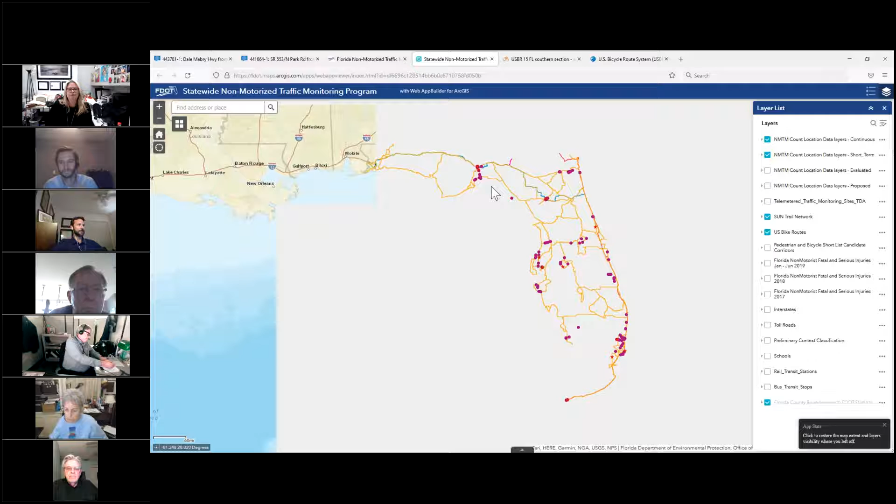This is the statewide map that shows all of the count stations where they have been conducted. Are you all able to see that?

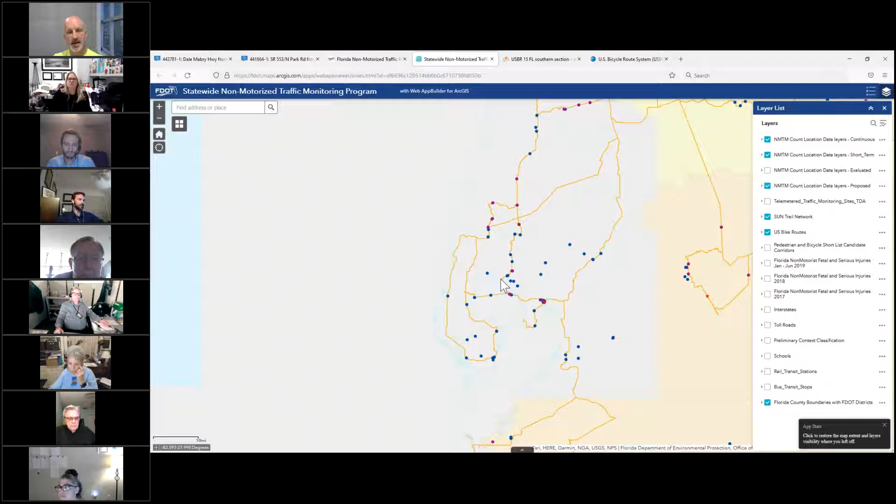Yeah, great. And then there are a couple of layers, both proposed stations, which are a much larger number of blue dots here. I think you'll see those ones on the Upper Tampa Bay Trail. And then there's a large cluster in downtown, which I'll save for a moment later.

And then these green dots, I'll turn some of the other ones off. The green dots are ones that have been further evaluated by central office, I believe, although counts have not been conducted. So I think those are some of the ones that are certain to be used in February. And then we're working with the downtown partnership on the other locations.

And all of that data will be available moving forward in one centralized database that fortunately we don't have to create from scratch. That would be nice. Okay, I gotcha.

So mostly it's a priority to create a database of counts on the multimodal, like the shared use path network. And to allow us to provide staff resources to set up those counters and take responsibility for the safety of those counters, although we've had some conversations back and forth and are comfortable with the limited risk that entails.

Okay, that sounds good. Do we have an unofficial motion to approve, or does anyone like to propose any amendments, comments, changes?

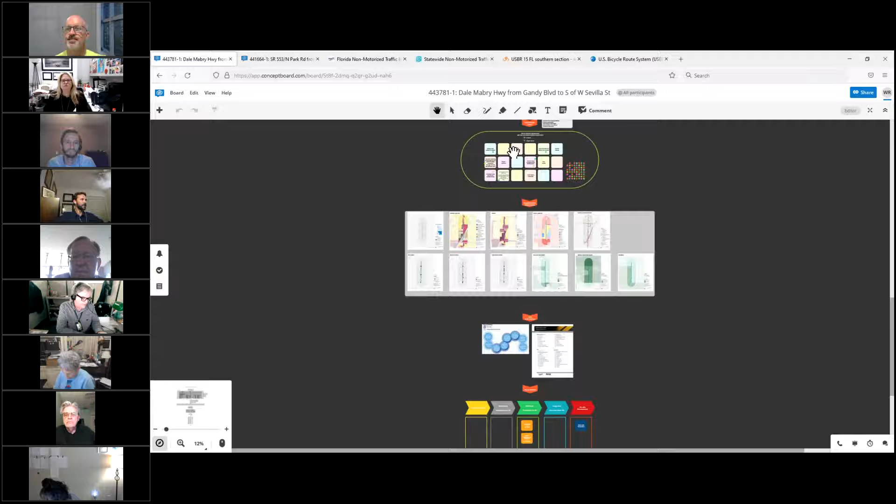The Dale Mabry Highway segment goes from just south of Gandy, the Selmon Expressway and the new extension there as well, to Sevilla Street on the north, which is just north of El Prado. So it encompasses about a 40 and 45 mile an hour stretch, and FDOT has been going through the process of collecting input on these.

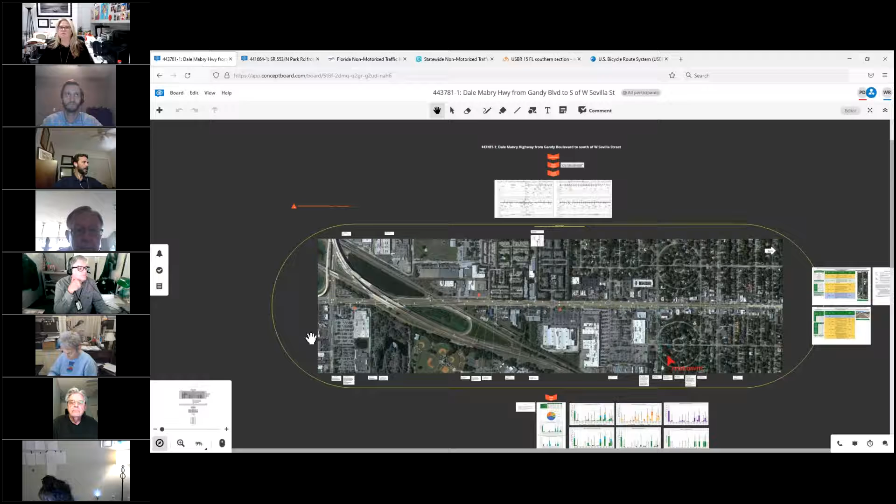It's held a series of meetings, roadway safety audits, both on-site and virtually, to look at possible improvements there. So zooming out a little bit, I can get to the overall, there we go. Sorry, it's hard to navigate this a little bit, but they have a number of comments and wanted to start running just these by the committee quickly.

There are a number of comments about enlarging pedestrian islands and reducing the radii of those turns. That is a heavy freight corridor, but those are being evaluated for possibilities.

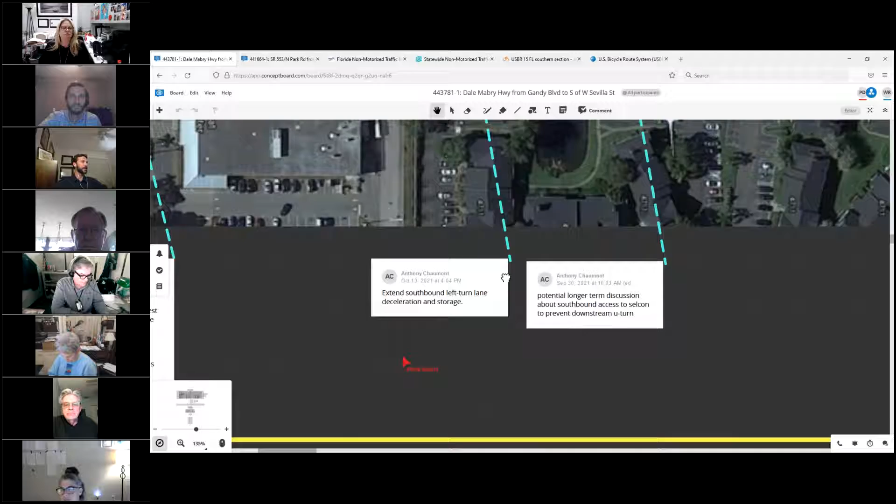I can even see that a couple of our folks have put comments in here. Extending the southbound turn lane, deceleration and storage, that is coming into the Selmon Expressway entrance, the new one, I believe.

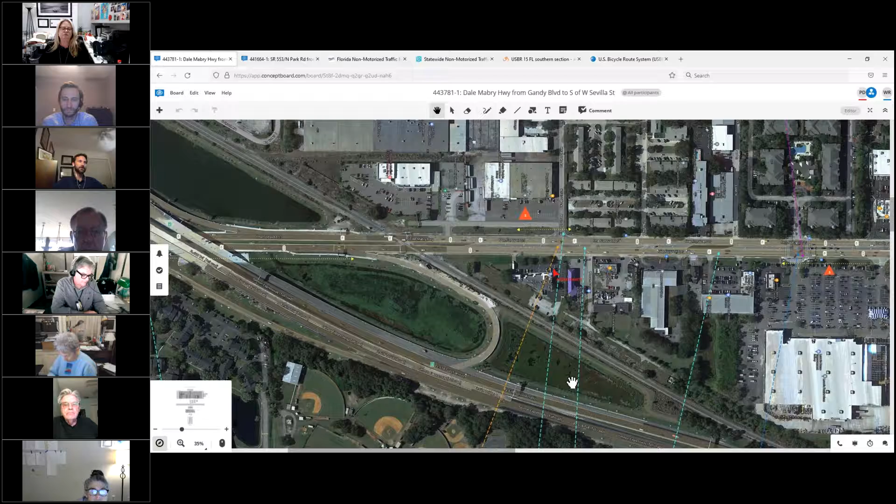And then as we move up, there have been a couple of pedestrian crashes at the entrance here to Fair Oaks, I believe, which was noted as a possibility for a mid-block crossing, or potentially an additional full signal.

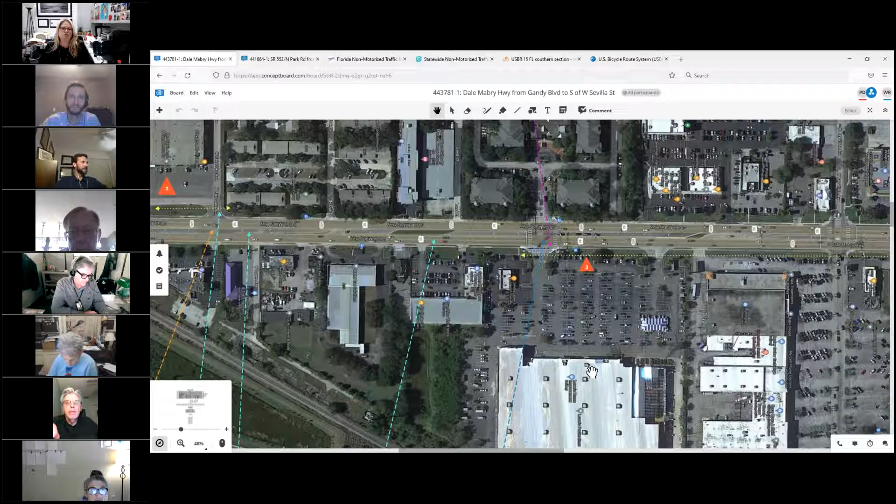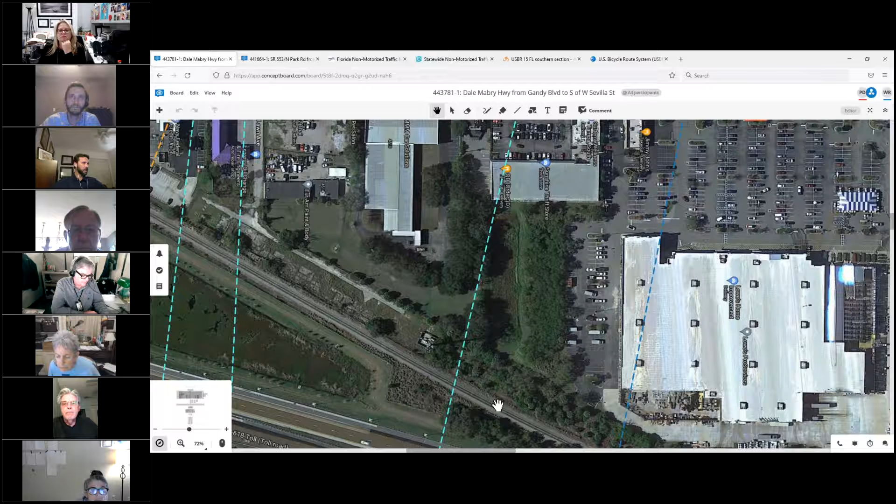And then coming up, this is a Lowe's here on the south side, and a number of condo and commercial buildings on the north. Sorry, I'm trying to scroll down to the comments here.

So they are evaluating a signal, or evaluating timing for all of those three signals. There is a noted congestion area there. And that is a new signal as noted.

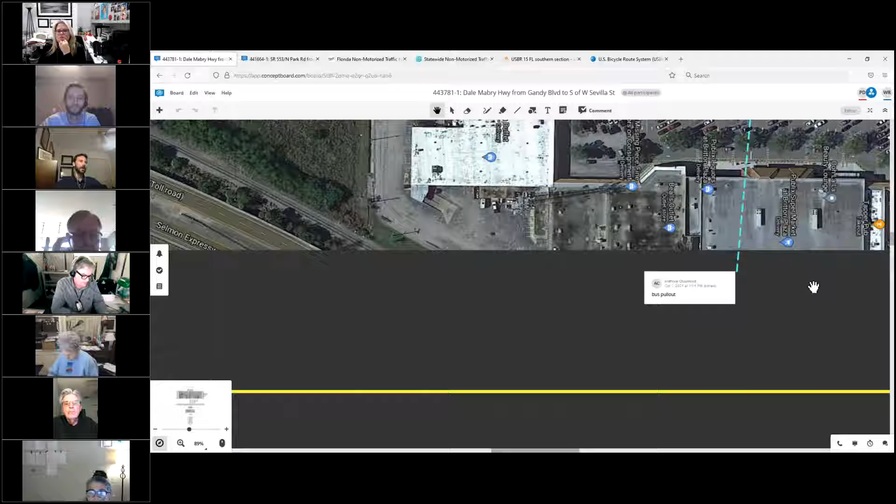There are bus pullouts at Britton Plaza that are also noted, and making sure that those are operating as needed with the traffic situation was also part of that.

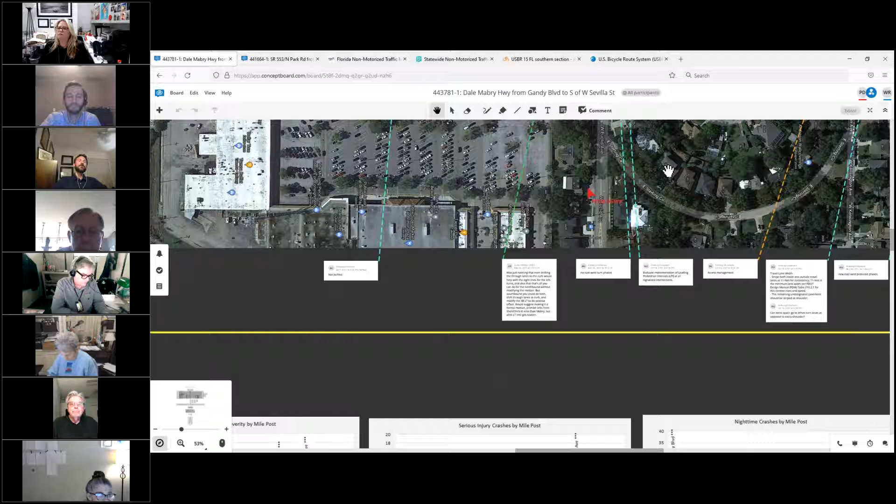So with that being said, this corridor, I know that there are people in the committee who may live or do business or drive through here. So if there are any additional comments, or if anyone wants to send comments to me to pass along to FDOT, those are certainly accepted.

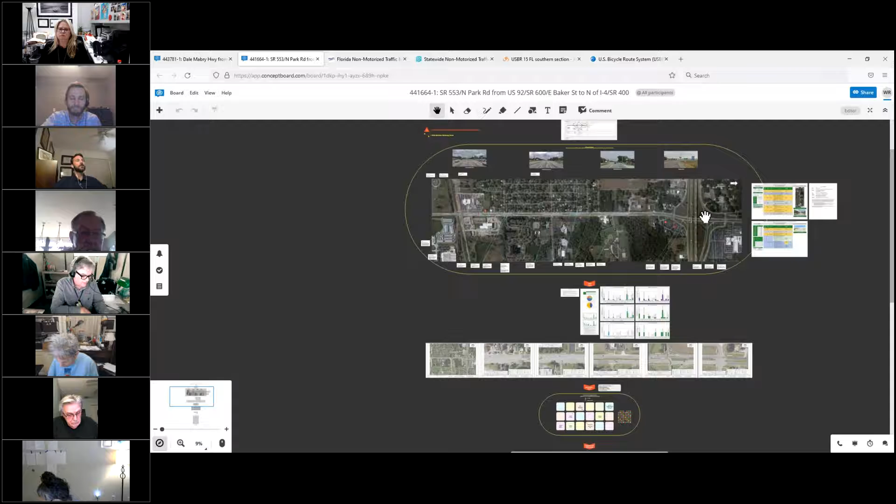And that will conclude my presentation on this resurfacing study. But I just want to do a quick overview of the Plant City Park Road study, which goes from I-4 on the north, which is to the right here, and Park Road, and US 92 to the south, excuse me.

So there are some noted striping issues in this location where you cross the railroad tracks and have this signal.

There were a number of comments about lighting, about some of the pavements on the leg here at the entrance to this subdivision, and questions about the number of lanes needed.

For both of these studies, these ideas have been grouped at the bottom into several sections: something to be discussed separate from the roadway repavement project, something that could be included in the repavement project, and something that would be longer term or separate.

A lane elimination in this area as it transitions to I-4 was either longer term and separate from the repaving, and a wider, basically double-sized sidewalk or side path throughout was not recommended at this location.

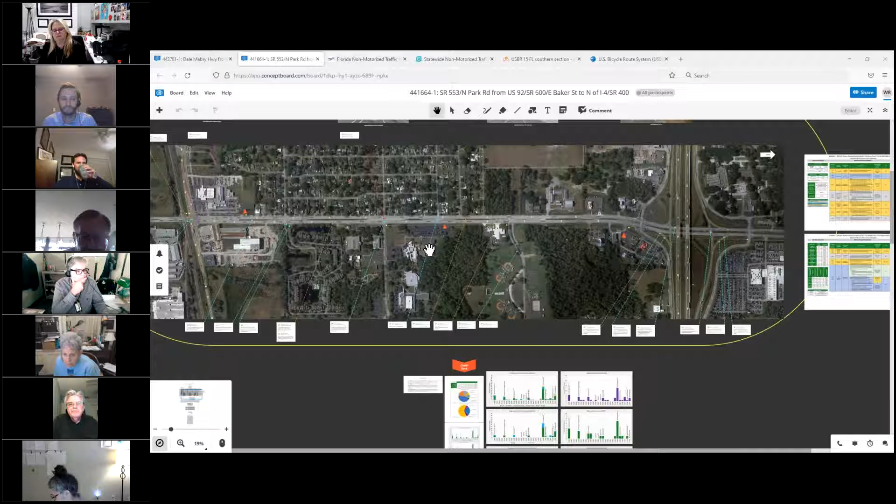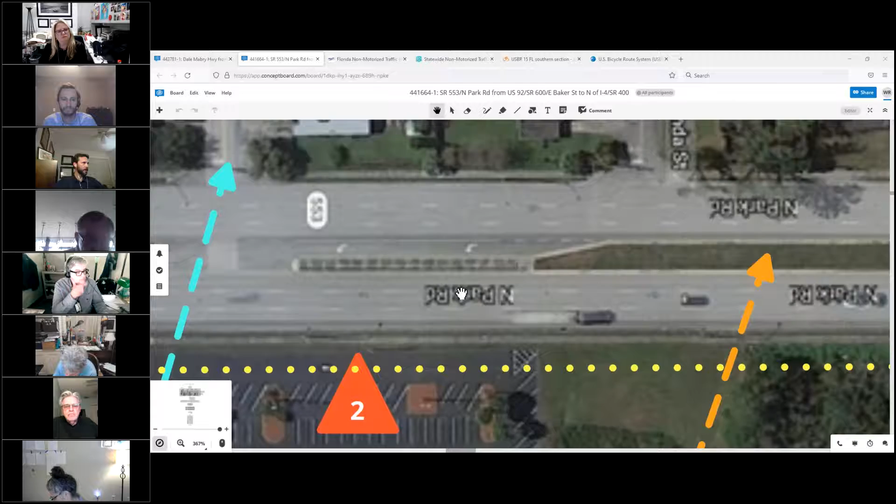Okay, what in the striping is provided for bicycle facilities? There are currently no bicycle facilities on this section. It is a 6-lane divided section, and I do not believe they are proposed.

Okay, because back in the before times, some of the organized rides in Hillsborough County, the Plant City ride, used to be organized at the HCC campus, and you'd have 2,000 or 3,000 bicyclists riding up Park. So I guess that's out of the question now.

I don't know that it's out of the question, but at this time, would that be before it was widened to 6 lanes? Yes, it was back when it was 4 lanes. Okay.

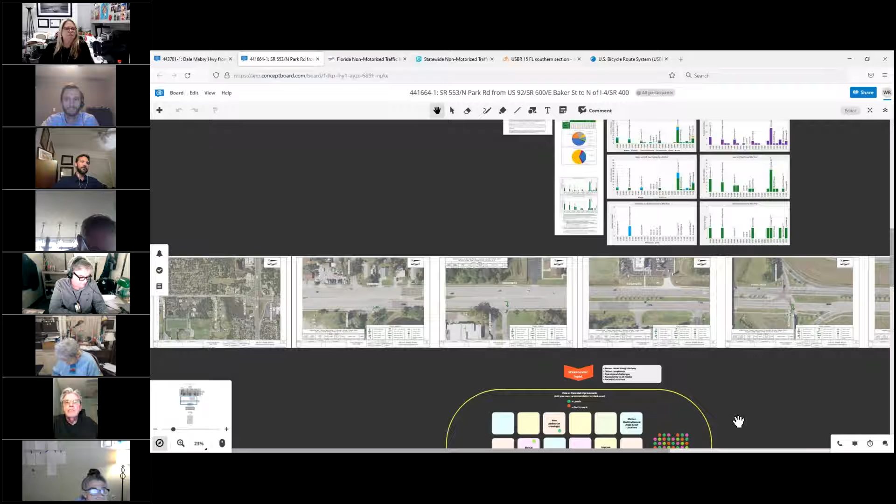I think any dedicated facilities would have to be part of the lane elimination, which was long-term and separate from the roadway repaving project, or at least in this study. But you're certainly welcome to comment on whether you believe bicycle facilities should be included with that project. Well, I'm just looking at HCC, and some people are going to want to ride their bike to campus, and right now it looks like a losing proposition. I mean, not every student has a car, right?

Certainly. Hi, this is Robin Baker, I'm with the City of Plant City. I just wanted to answer that comment. We do have a bike-ped plan that was conducted by the TPO, I believe in 2017, and this portion of Park Road was planned as part of that bike-ped plan to include bike lanes. Obviously, we're working with the DOT in the preparation for this project.

I believe the city is against any type of lane dieting on this particular road because development in this area and in direct vicinity of this portion of Park Road, we expect over the next 5 years to see more than 6,000 homes and around 5 million square feet of non-residential development in this immediate vicinity. So we're hoping for no lane diets, but maybe some other alternatives along this portion of Park Road, maybe a trail on one side instead of sidewalks and bike lanes, something that might accommodate both but still allow us to keep the 6 lanes in this portion of the roadway.

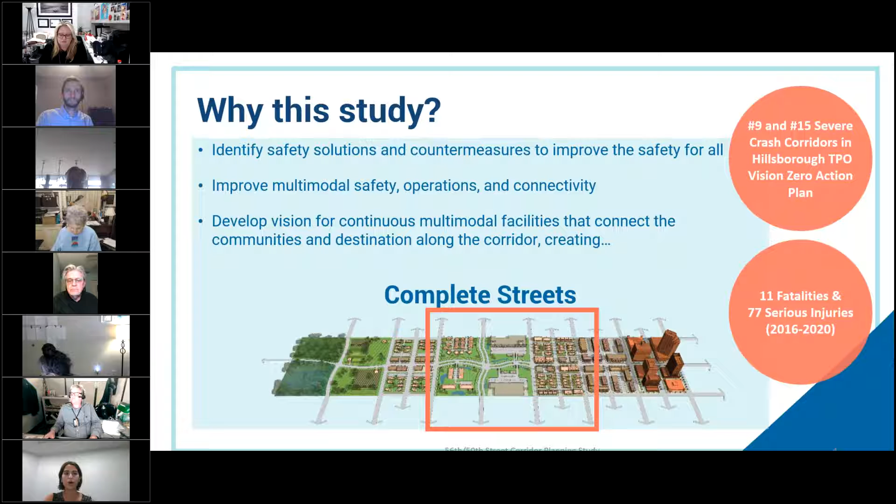There's also a vision to connect the communities of the corridor across the three jurisdictions that it spans, which includes the City of Tampa, Hillsborough County, and Temple Terrace. Through the study, we're hoping to weave together the unique existing conditions of the corridor in terms of the land use contexts that are out there right now, but also what the future place types will be.

Like Brian mentioned, the corridor runs from Selmon Expressway to the south to Fletcher Avenue in the north. It's about 8.5 miles long, predominantly a 4-lane cross section, 6 lanes in the southernmost extent in the City of Tampa. There are on-street bike lanes throughout most of the corridor, except in Temple Terrace, where the on-street bicycle lanes transition to sharrows, and there are sidewalks along the entire corridor.

Although while we were out there doing a field review, we did see some drainage and other maintenance issues that are opportunities for the study to explore improving through some alternatives. I'll talk more about that in the next slides here.

The corridor also carries a lot of transit, with Route 6 of the Hart System specifically running along it and having some of the highest ridership in the Hart System. The Net Park Transfer Center is also located near the corridor, which is a major hub for transit routes and for multimodal activity.

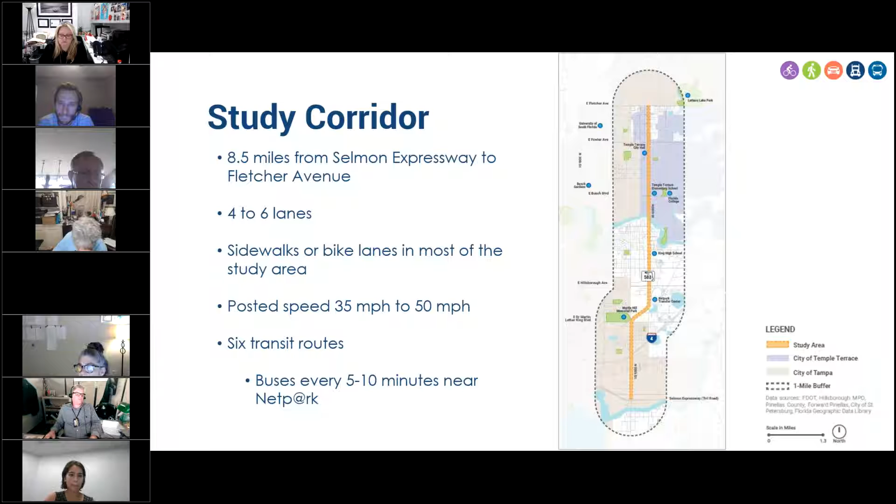We've done work to define the problems we're seeing out in the corridor now through our existing conditions, and we've synthesized that information to share the issues and opportunities with you all today. The culmination of that existing conditions work has resulted in a draft purpose statement and needs, which I will share shortly. We plan to take the draft purpose statement and needs to the public in a public meeting in December to get and integrate feedback from the public.

The final major milestone step for the study is to develop concept alternatives, for which we'll be meeting with our project advisory group, or PAG, to go through those alternatives, select a preferred one, and develop some strategies for FDOT and the local partners to advance.

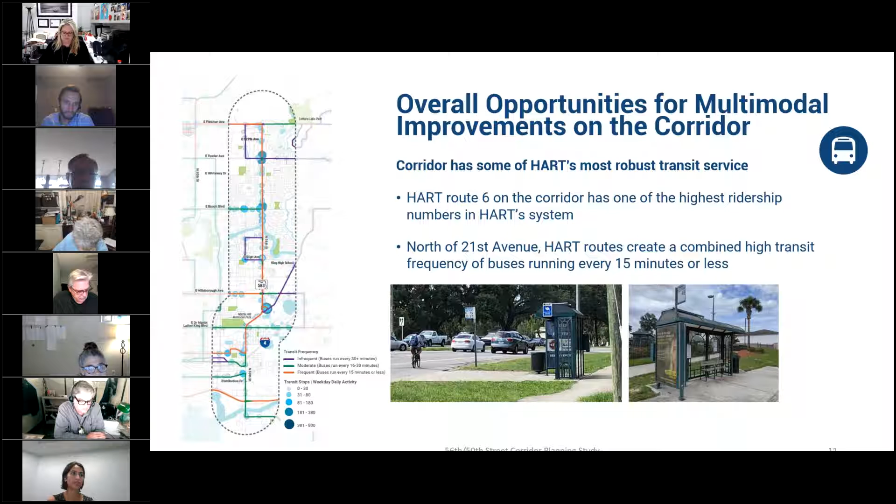The bubbles shown in this figure are showing transit activity, the number of people getting on and off buses, and the bigger the bubbles, the more of that activity there is. We're seeing those bubbles larger throughout the transfer center, but also in the northern extent of the corridor.

The data from our field observations shows that there isn't a huge issue with vehicle congestion between segments of the study corridor. Most of these segments are operating at LOS D or better, which is meeting the FDOT target. When there is congestion, it's really associated with some downstream intersections operating at LOS E or worse. Some of that traffic crossing the study corridor is contributing to congestion, but vehicular operations are more or less doing pretty well.

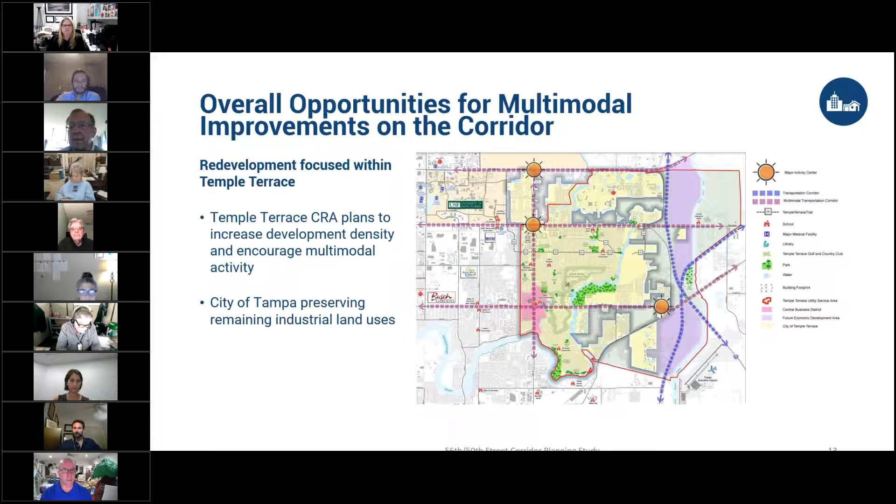I didn't quite understand what Sigal said about opportunities for speed reduction. Is that something we're looking at? What is the rule? I don't do this for a living, but the rule is supposed to be like 85th percentile is how we set our speed limits. But clearly those 85th percentiles are way wrong based on what's currently set there. Maybe we need more speed enforcement because it's way above the speed limit people seem to be doing. So are we looking to lower the speed limit, raise the speed limit, keep it the same? What's the thought process?

Yeah, that's a great question. So, Brian, do you want to kick that one off? Yeah, so part of the study is taking this information and looking at it. They are driving fast. Changing speed limit signs isn't really going to fix the issue. Enforcement's being done. The chief of Temple Terrace is part of the project advisory group, so we've been talking with him. Out of this study, we'll take a look at speed management strategies that we can use, rather than just changing signs. We're looking at engineering and other ways to change driver behavior out there by making them feel a little more uncomfortable with speeding through different strategies, like median changes, landscaping, sight distance improvements, that we work on with the engineering side. So that's how we'll look at addressing some of those issues.

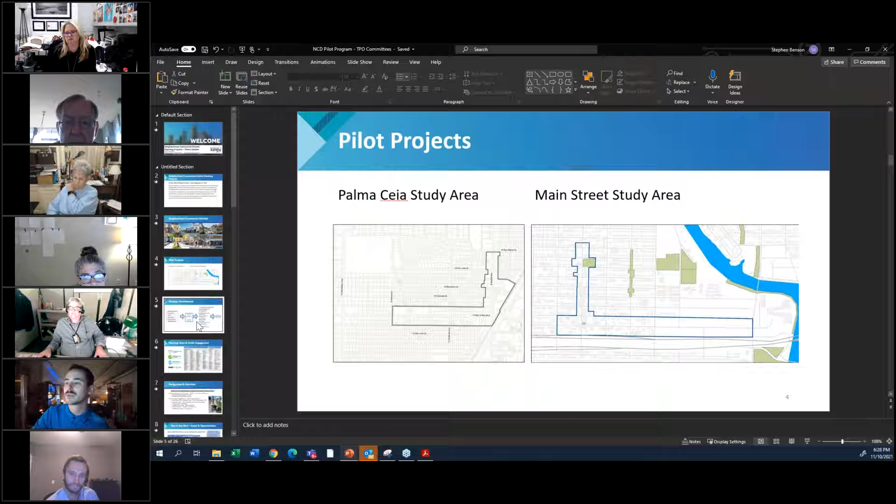The process we went through was team-oriented, working with all of our different agencies that have a stake in the corridor. We conducted both studies in-house using our own staff resources and also resources contributed from the Planning Commission, the MPO, the TPO, and some of our other partners, the school district as well. And we held community meetings.

We had some focus groups, sent out surveys to the surrounding neighborhood associations, had some social media activity, and poll questions that we put out.

We also engaged the University of South Florida, specifically the Florida Center for Community Design and Research. Taryn brought her students and graduate students to come and give their take on what they would do to improve these areas.

And then we took a look at some high-level economic data just to get a sense of the trends in the market to deliver the type of development that's currently planned for and zoned for in this area. With that information, we developed some key themes, which we called community issues and opportunities.

We also created a vision statement that really represented the direction that each of these communities wants to go in the future. And then we did a deeper dive.

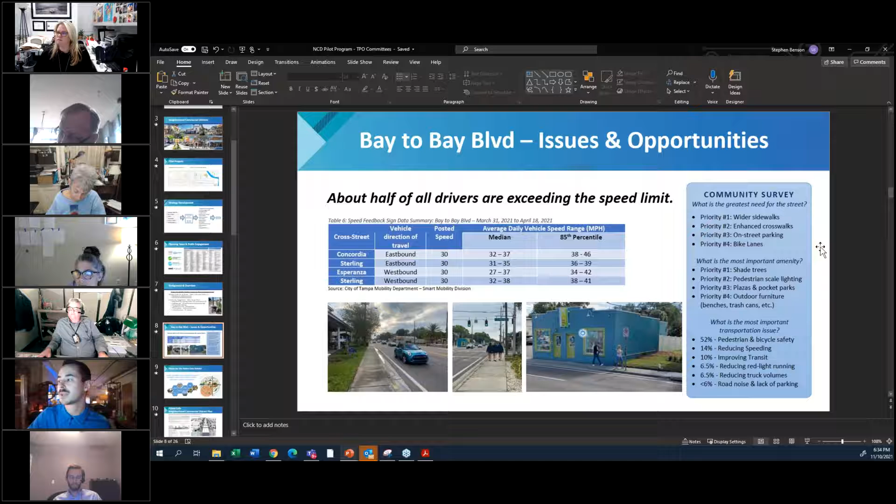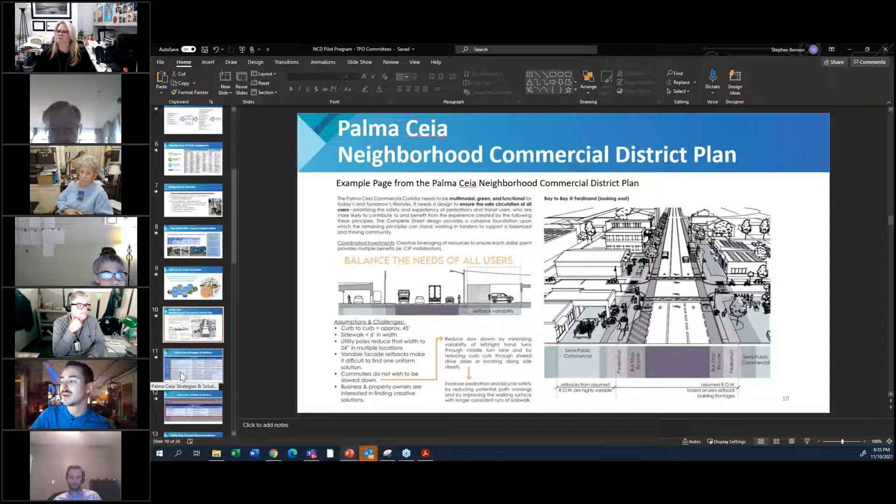Here's an example of some of the work that the USF graduate students helped us with, taking a look at some different cross sections and developing their own perspective on what they felt like should be done along the corridor. You can see this one is an example of a road diet configuration, taking the existing road, which is 2 lanes in each direction, and reducing it to 1 lane in each direction with a left-hand turn lane, as well as it looks like they were able to fit in some bicycle lanes and much wider sidewalks and more substantial pedestrian realm. But this is one of about 10 different student projects focused on developing distinct visions for the corridor.

So how can we upgrade our infrastructure? The fourth key theme was public safety, both from a roadway standpoint, but also lighting and other needs. The fifth was urban parking, so developing a clear framework for how parking should work in the area.

One of the big things holding back development that we were able to garner from our interviews with some of the business owners in the area is that the on-site requirements for parking are really difficult to meet for redevelopment, because all of those commercial properties that are along Bay to Bay, the size of those lots are very small, and so it's really hard to fit all the surface parking that's required. So that's why you're not seeing as much redevelopment activity on Bay to Bay itself as you might see in other parts of the city, even though it is a very economically vibrant area. And then that sixth and final focus area was to look at land use and design standards.

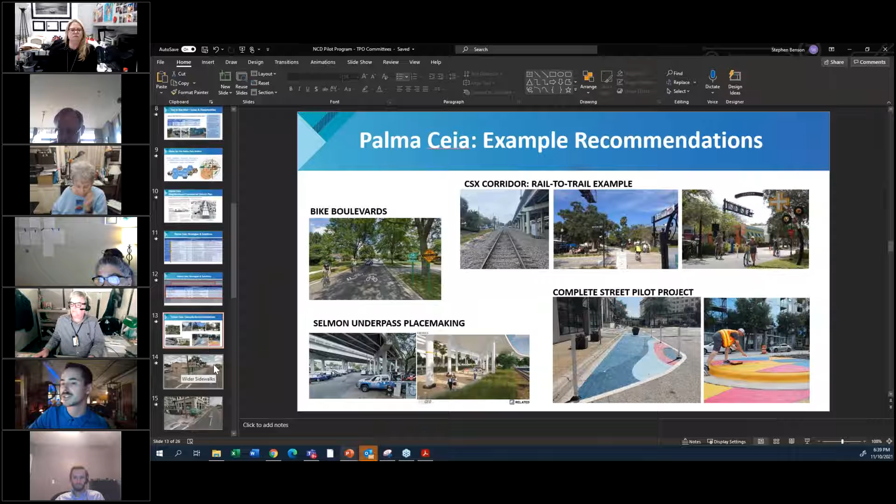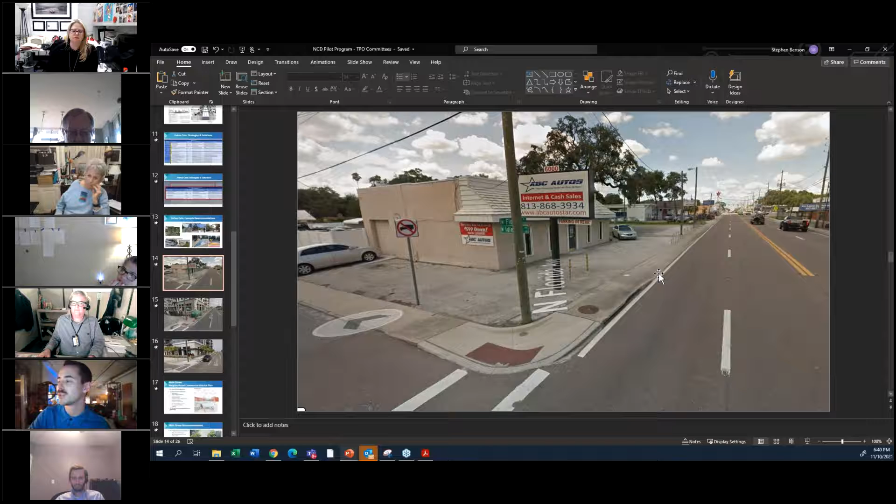This is a building similar to many of the buildings on Bay to Bay. You can see the sidewalk is really flush with the road. It's a 4-lane undivided road, just like Bay to Bay, and there's really no clear sense that behind this building is a neighborhood, and that this is the district that should be serving that neighborhood.

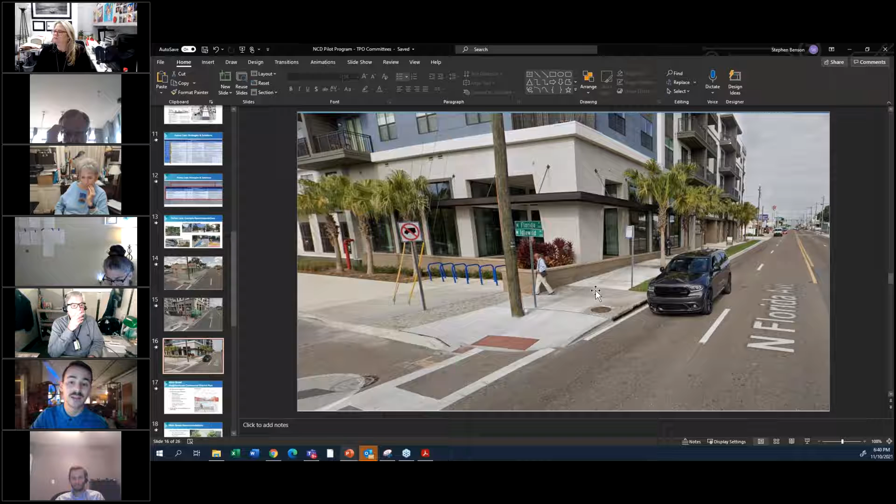So over time, through code changes put in place by the city in the Seminole Heights area, you can see how through redevelopment the streetscape is totally transformed. The roadway is still there, still a 4-lane road, but the pedestrian facilities now include bicycle parking and a transit stop. All of this can be done without the city necessarily having to go and do a project—it's done incrementally with development as it comes online. So that was something we also recommended.

Transitioning real quick to give you a sense of the Main Street project and where that landed. There were about 60 recommendations focused on 10 different community themes in the West Tampa area of Main Street, and about half of the recommendations are already underway.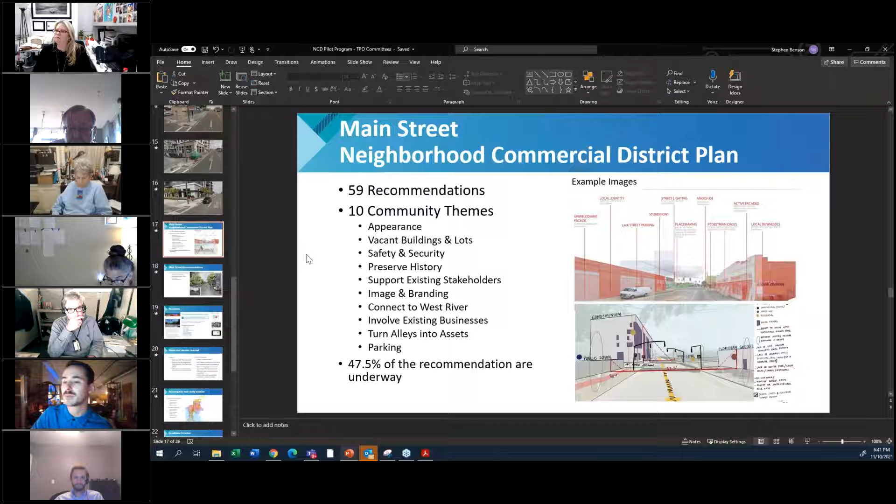This is an example of what some of the USF students put together in terms of analyzing the urban design of the area, what deficiencies exist, and what could be done to address that in the future.

Some of the example recommendations were, very similar to Bay to Bay, taking a look at the streetscape and how to allow the area over time to evolve into more of a Main Street physical appearance.

Hosting an annual development forum—this was a recommendation from the CRA to actually implement the community redevelopment area.

Looking at a parking plan for Main Street—parking was one of the big complaints, specifically lack of parking or a perceived lack of parking. So the West Tampa CRA has already moved forward with putting together a scope for a parking plan and bringing a consultant on board to take a look at that more closely.

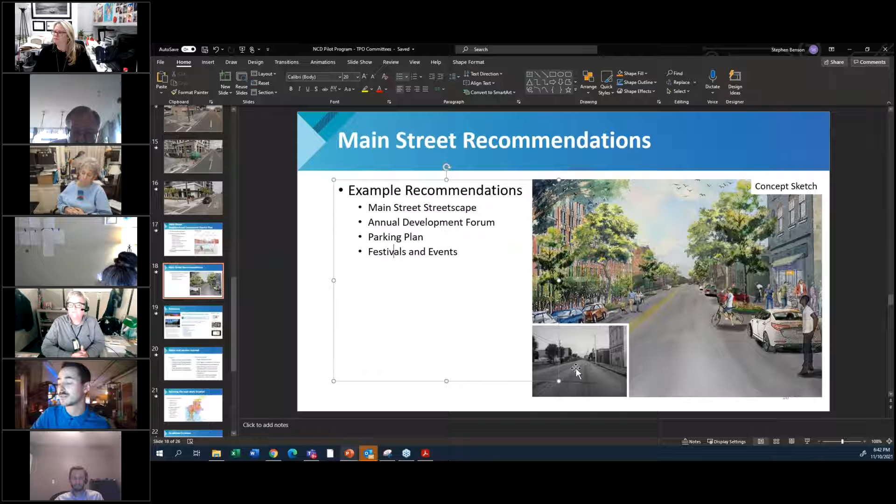And then just being more proactive about hosting festivals and events, bringing life and activity back to the area, because of course it was much more active in the past than it is today.

If you'd like to take a look at these reports in more detail, the website is there, as well as recordings of all the presentations we gave. The benefit of this occurring during 2020 is that everything was virtual, so all of our meetings and presentations were recorded and posted online. So all that information is there if you'd like to take a look at it.

And then really the status and some of the lessons learned. Both plans have been completed and closed out. And what we've done now is taken all those recommendations and transmitted them to the implementing agencies, or implementing departments if it's internal to the city.

Moving forward, we would like to target doing at least one additional neighborhood district plan per year. And I'm going to show you some of the corridors that we're looking at moving forward.

The multi-agency planning team that we created really brought a huge amount of value, just all the expertise from all the different professionals involved. Not necessarily as much as if we had a huge budget to do this, but just having everybody at the table from all those different agencies brought a lot of value, as well as having USF at the table. That was a great beneficial partnership.

Moving forward, we are going to be looking to add consulting services to provide some of that additional expertise that we don't necessarily have in-house, and also to reduce the amount of time it takes to do these studies.

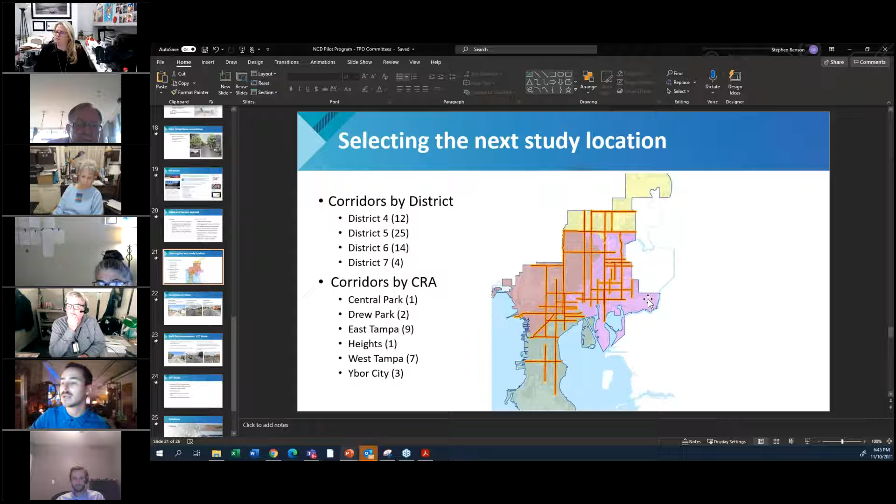All of these have a great existing development pattern of commercial development, neighborhood scale commercial development, and they need a little help and a little love. And so hopefully we can move forward.

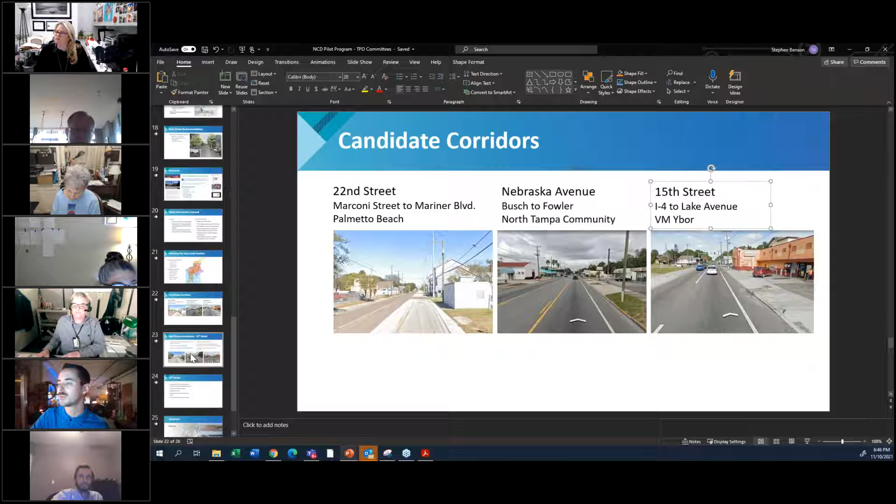The corridor selected for next year is 15th Street in the Ybor area, and there were a couple of reasons why we selected that. The existing mix of commercial and residential uses was really interesting. If you've ever driven up and down 15th Street, you'll see little clusters of almost like corner stores, and in between those clusters are just residential homes or apartments. But really it functions as one cohesive district.

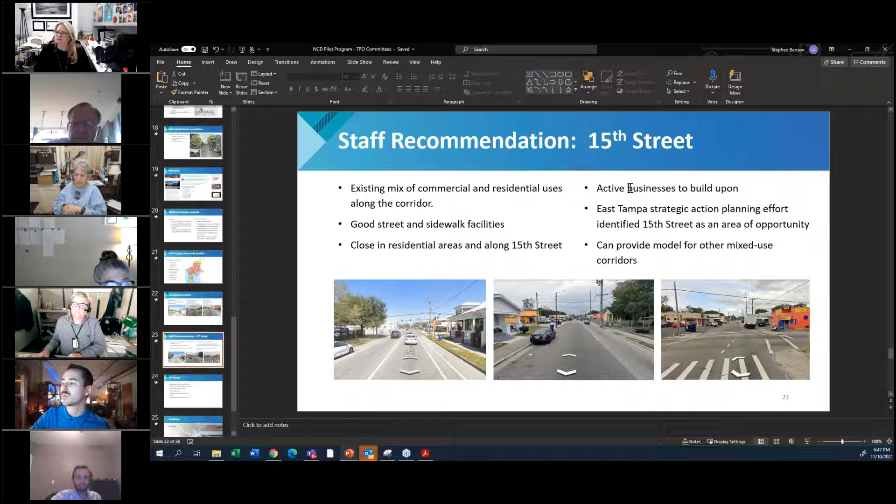So moving forward, we received an award from the Department of Economic Opportunity in the amount of $50,000, which we're very thankful for, because now we'll be able to bring a consultant on board to lead this study for 15th Street. We expect it to kick off once we get the contracting finalized in early 2022, with about a 6-month duration.

And then once this gets going, we'll be sure to send information about how to participate in the study to Wade so we can share it with you all. But that concludes my presentation, and I'll be happy to go into any more detail or answer any questions you might have. Thank you.

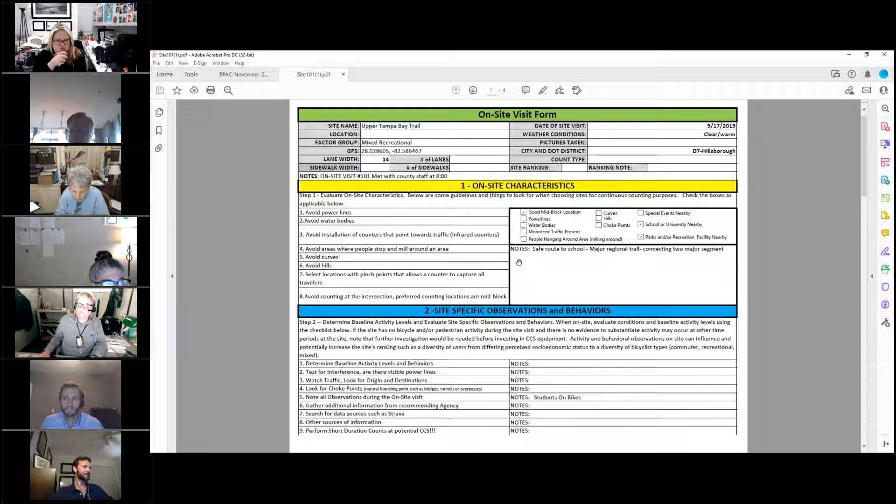So that was the site visit info that just downloaded, and it has the full visit form that talks about what they observed and what to observe in those locations, and even the pictures. And that would be just by Waters Avenue. So with that being said, there are several other sites, as Mr. Rank mentioned, proposed along this.

DOT Central staff did mention that they are looking at a couple of these for future counts this time and additional counts moving forward. You can see how those proposed counts have everything that has been proposed throughout the area. If I turn off the proposed layer, you'll see there are a lot of proposed sites and very few existing sites.

The existing sites are just these ones in red. So that's the gist of it. If there are any questions or any additional sites folks want to propose for longer term evaluation, please let us know. Thank you.

All right, thank you, Wade. As he said, if there's any comments or recommendations, please speak up now. All right, well, hearing none, Wade, it seems like everyone's pretty happy with the recommendations and this whole plan to monitor and track bike and pedestrian counts, so well done there. And with that, we can go ahead and move on to the next agenda item.

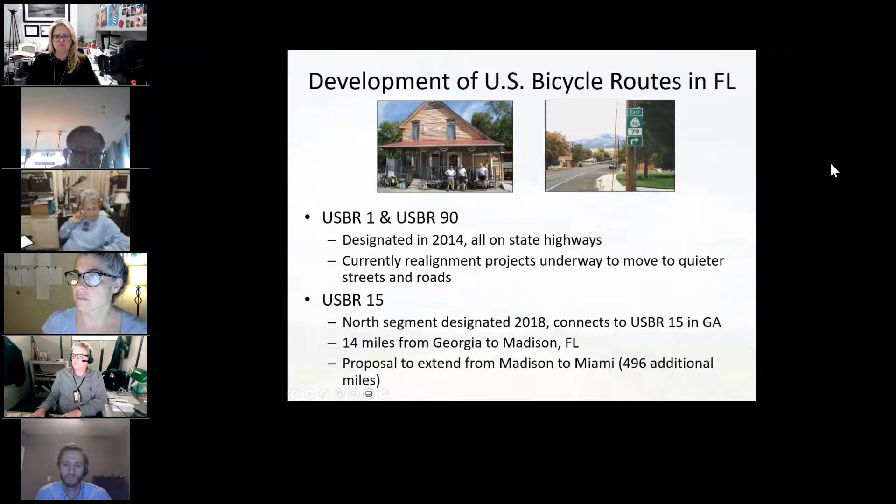So in order for Fdot to request the designation as a US bike route, jurisdictional support is required. Whoever owns the pavement, whether it's a street, a road, or a trail, needs to tell Fdot that they're in support. There are 19 jurisdictions along the proposed US Bike Route 15 extension, and each will need to provide a resolution of support or a letter of support to Fdot.

Adventure Cycling volunteers like me are doing local agency outreach. So that's what today is about, starting with the BPAC and then taking it to the county and to Plant City to get their approval as well.

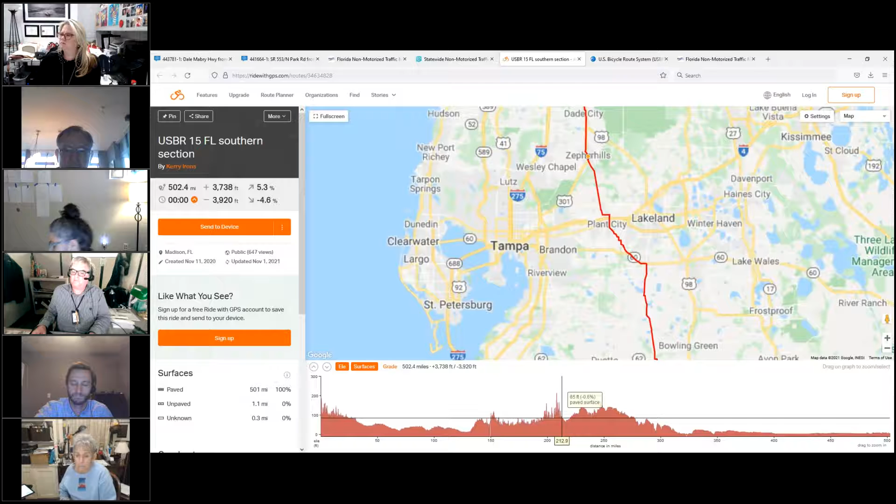So if anybody has comments about that, either during this meeting or whatever the next step might be, I don't know. Obviously, from my perspective, it would be great if you guys said, yeah, this is perfect, we'll vote to support it right now. I'd be surprised if that happened, but comments.

Hi, Kerry, this is Jim Shirk. As a member of the ACA for many years, I'm about to surprise you because I really would like to take the lead on this, Wade.

Yeah, Jim, so this is basically Hillsborough County and Plant City, those are the two jurisdictions. Working across the state of Florida, what we found is if we can find a BPAC to give us a boost and support, great. And then they take that to a TPO, an MPO, an RPC with various designations, and that carries a fair bit of weight with the county and the city. But I would be more than happy to work with you and let you carry that freight.

Okay, I believe if it's okay with you, Wade, what I'd like to do is before the next meeting, prepare a statement from the BPAC for internal review so we can vote on it next month, if that's good with you. Absolutely, Jim, and I'd be happy to set up any meetings with Plant City or Hillsborough County staff prior to that, I think that would help prior to really taking a vote on anything.